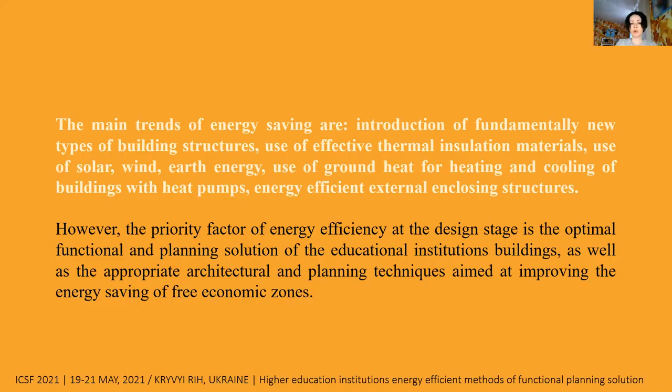However, the priority factors of energy efficiency at the design stage are the optimal functional and planning solution of the educational institution's building, as well as appropriate architectural and planning techniques. aimed at improving the energy saving of free economic zones.

Progressive domestic and foreign experience in forming a network of higher education institutions shows that the most realistic direction for optimization and development of higher education is the consolidation of educational institutions, clear zoning, implementation of compact architectural and planning solutions for educational buildings and structures.

The main scientifically substantiated and tested by project practice principle for planning the sections of higher education institutions is the functional zoning of the territory. Areas of educational zones should be divided into the following main zones: educational, sports, residential, economic.

The size of the territory for the construction of educational buildings depends on the size and profile of the free economic zone. Theoretical research has defined and project construction practice has confirmed that the larger the number of university students, the more efficiently the territory is used.

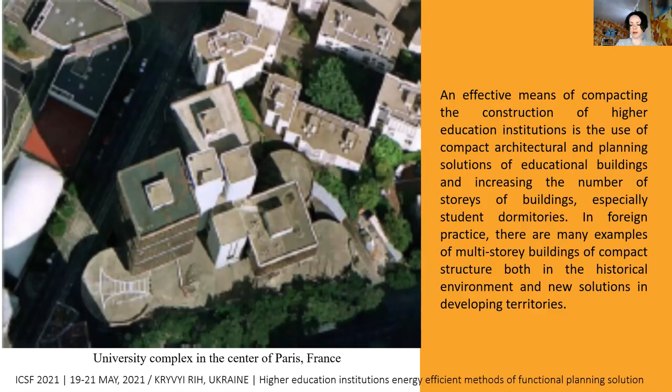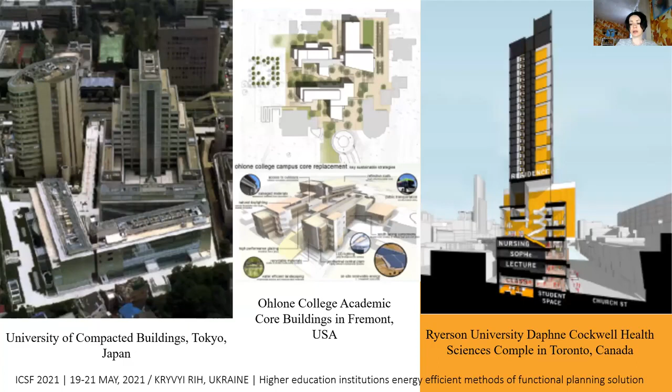In Ukraine, high-rise buildings are built and successfully operate in higher education institutions of Kyiv, Dnipro, Kharkiv, Donetsk, Odessa, and other large cities with compacted building. Much of the university complexes were built in the second half of the 20th century, so most of the buildings have a high level of wear, both physical and moral. To increase their comfort and energy efficiency, large-scale reconstruction and renovation works are required.

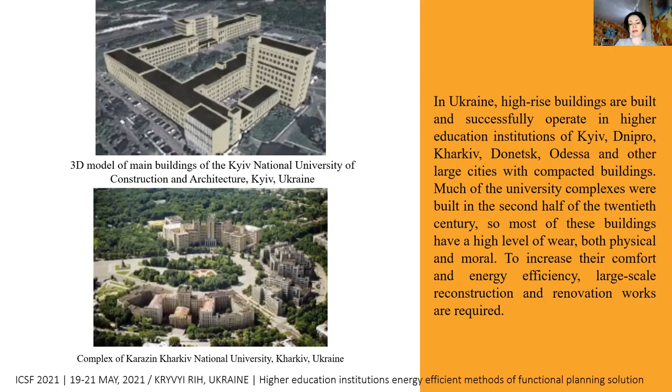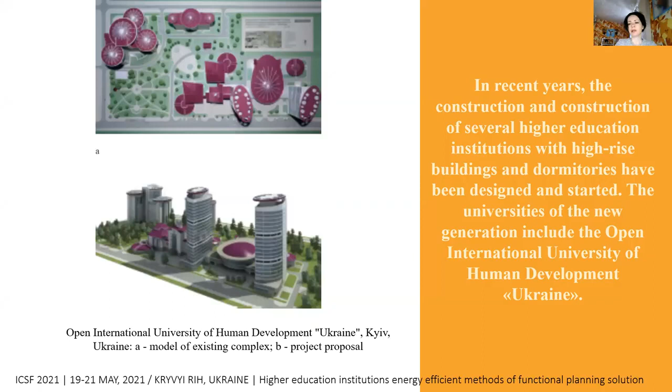As an example, you can see the model of the main buildings of the Kyiv National University of Construction and Architecture in Kyiv, and the complex of Karazin Kharkiv National University in Kharkiv, Ukraine. In recent years, the construction of several higher education institutions with high-rise buildings and dormitories has been designed and started. The university of the new generation includes the Open International University of Human Development Ukraine.

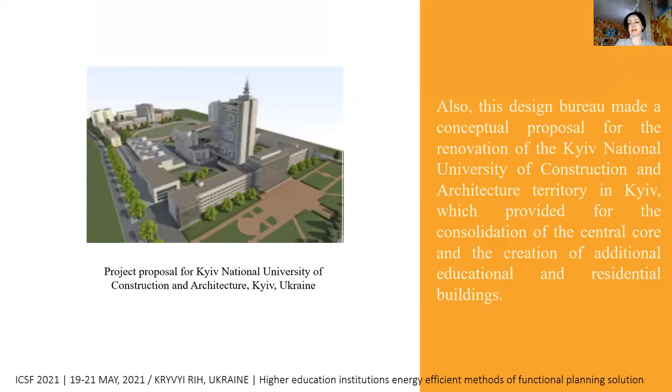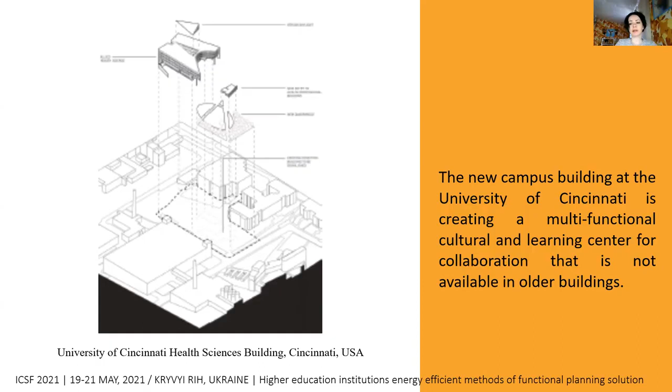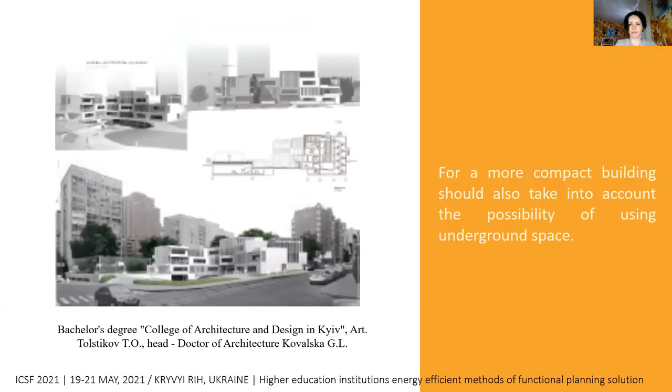For a more compact building, we should also take into account the possibility of using underground space. Energy efficient methods include the use of landscaping in the architectural and planning solution of buildings. Currently, there are several areas in the landscaping of university buildings: landscaping of roofs, landscaping of facades, landscaping due to new ecological materials.

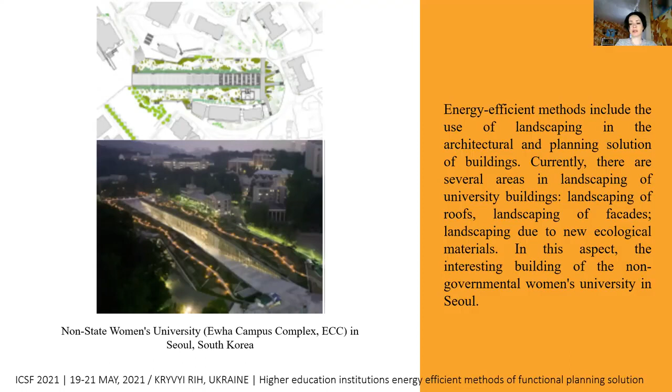In this aspect, the interesting building of the non-government women's university in Seoul increases the economy and practical use of rainwater. Special tanks have been created for it from where water is distributed for the operation of bathrooms. A similar solution was applied in the design of a social and cultural center in the historic center of Paris.

Energy efficiency is a necessary measure in the modern architecture of higher education institutions. The architect should think about creating an energy efficient building at the design stage. The optimal functional and planning solution of buildings and the establishment of cooperative architectural and planning techniques can be called the primary factors in increasing its energy saving.